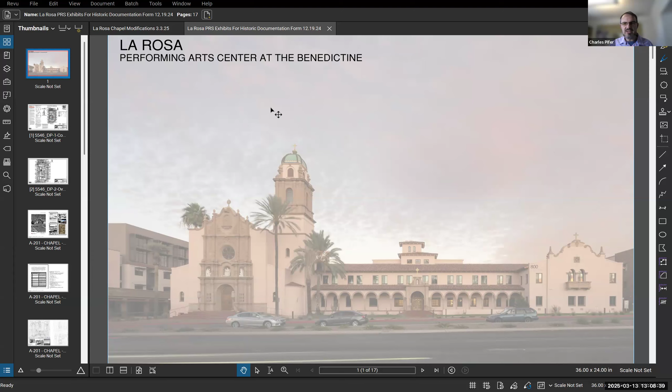There are going to be two projects here, and for now they're on the same campus. For now, all we're talking about is a minor modification to the plans we previously reviewed, as Michael stated, for the chapel piece. So what we're looking at here is the previous set. I have a one-pager here I can scan around on that describes everything pretty quick and easily, or I can give a bit of the past history on the project.

I'd be curious if anyone would want a greater level of detail, or if I should just dive in right here. I'm okay with diving in. What about the rest of you? I agree, I think it's still pretty fresh for all of us, so a minor review is fine for this one. Okay Charles, great, we can ask you questions if we need more detail.

Got it. And I can pop right over to the other one and we can look at what we looked at before. So I'll go ahead and dive straight in.

After we completed our egress study for the building, and this building has considerable need for that as the chapel space itself will be hosting up to 650 people, there's a significant egress requirement. It turned out we weren't able to meet the width at the exit that we have here.

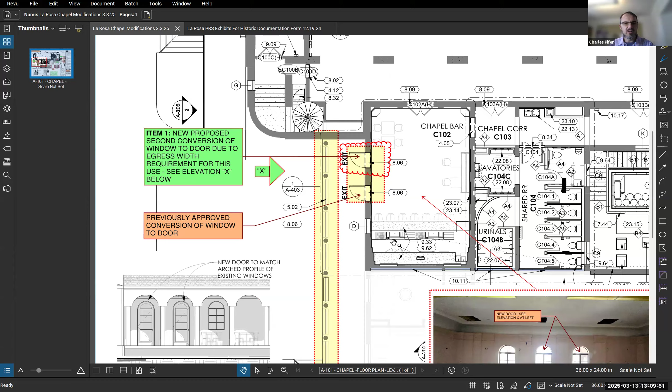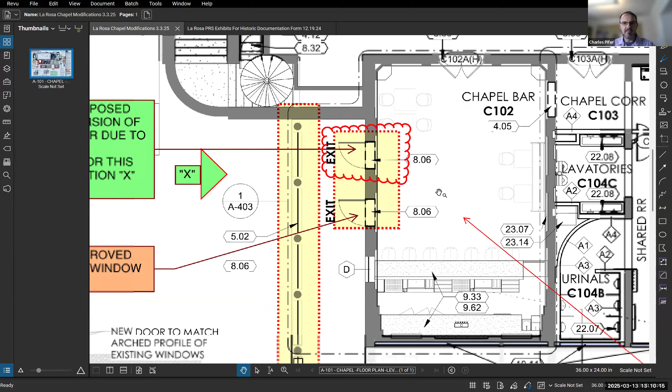The previous version of the plans that we reviewed had only one of these windows converted to a door here at this facade. We are now proposing to do the exact same treatment with the exact same spacing of mullions to match over to that existing window that is to remain. So now there are two of those. They are exactly the same as each other, side by side, the same treatment we looked at previously.

Here is a photo of the interior of the room. What we are proposing is that we will just be removing this masonry beneath the windows and converting them into a door of that same width. Maybe I'll pause there and ask if there's any question. I think there are two other items related to this project I'd like to discuss and see if anyone has any commentary, or I can take questions at the end.

I'm good. Everybody else okay for him to move forward? Yep, I'm good. Great, okay. And Joel gave you the thumbs up. Go ahead.

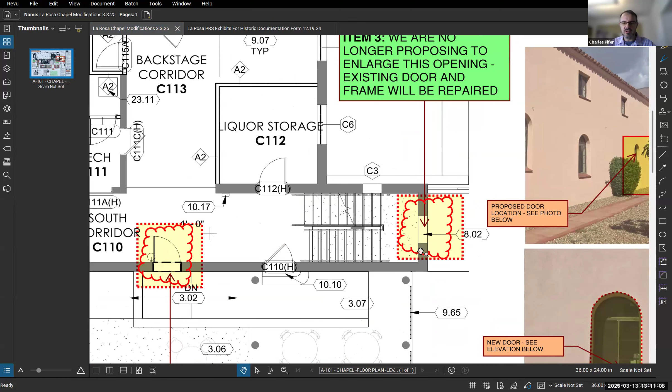Similarly, what we were proposing previously was that we were going to be enlarging this door here so it could be used to load large equipment in through this sort of back-of-house stair. The owner has determined that they do not have a requirement to move that large material through this door.

So we are now proposing to do nothing to this door other than to repair it in kind. It is a half-light door. I thought I had a picture of that - perhaps not, I think it's actually in the other one. I can zoom over to that, but it's a half-light door that we'll be just repairing. It's an existing door that will remain here in lieu of new saw-cutting a large opening and putting a double door at that location.

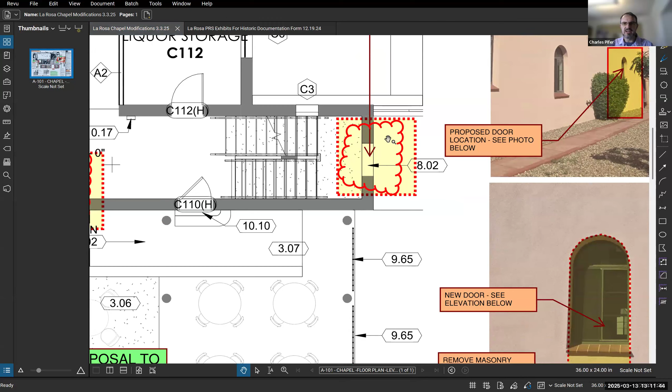Okay, and then in this same area, the ownership has determined that the current configuration of this door here—for a little reference, there's a bar getting installed in this existing courtyard, and the people who operate the bar occasionally need to go to this room right here.

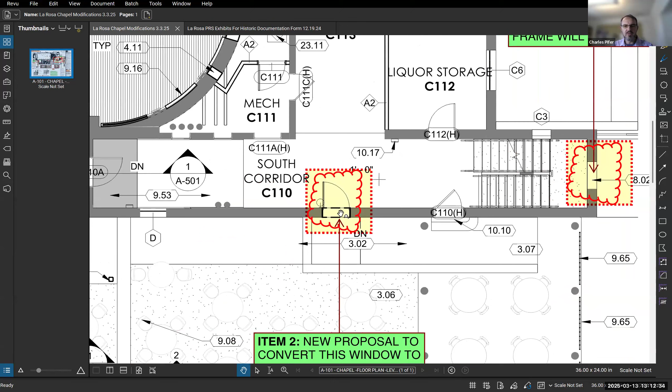And so there's a need in non-emergency conditions to go in and out of this door. This is the up portion of the stair, and they were worried that somebody's going to open this door just as someone is walking up, and they'd lose some teeth or sustain injury due to the proximity of the door to the landing. So it would be their preference to do the same thing we're looking at on the west side of the building, at this location inside the courtyard.

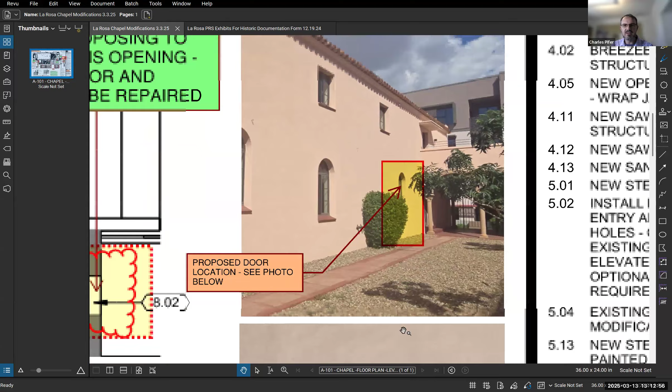For reference, here's a picture of that condition in this interior courtyard. This is not visible from outside the parcel via any vista, so this is the location we're proposing to do that same strategy. This would be the door, and it'll be exactly the same as the doors on the west side—a custom steel door with profiling and detailing similar to the existing window in place.

I'll note, as identified before, there's a grade difference here, so in the previous version we were proposing a ramp up to this door. The ramp is now configured slightly differently so that door is effectively abandoned in place, but we're maintaining the historic concrete component of the landing, casting around that and preserving it, as well as around this column. We'll provide 2 new steps up here, and a ramp coming down this way so they can provide an accessible route into this rear space.

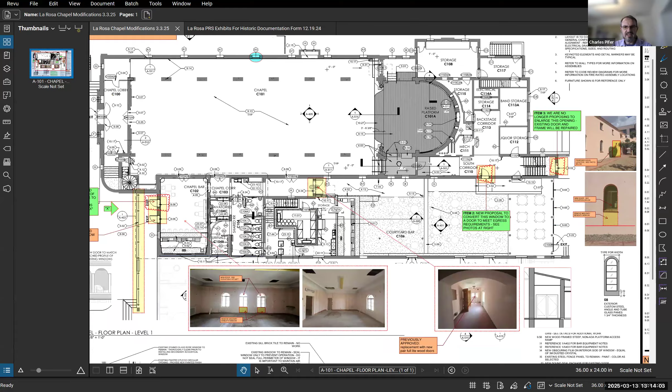And that's it, actually, for our proposal here today.

All right, who wants to start with questions? I can start, since I reviewed these when they were maybe going to be a minor review.

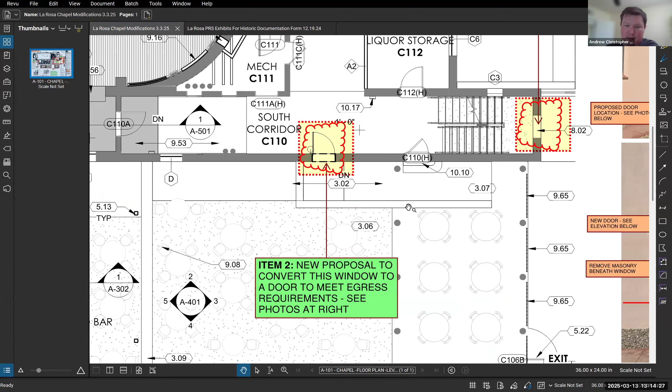The new ramp here—it looks like that's going to conflict with one of those columns in the colonnade. What are you planning to do there? Are you just going to pour concrete around the base, or try to adjust the base up? My thought for both of these elements is actually to attempt to preserve them in place.

To essentially consider the ramp to be reversible, which would mean we're going to provide a compressible material around the base detailing of the column when we cast that concrete, and a release membrane at that location so it could be removed at a future time. I think moving the base detailing up, we can catch a bit of that here—the ramp will be high enough that we'll be into the primary segment of that, and this will all be concealed and, in theory, restorable at a future date.

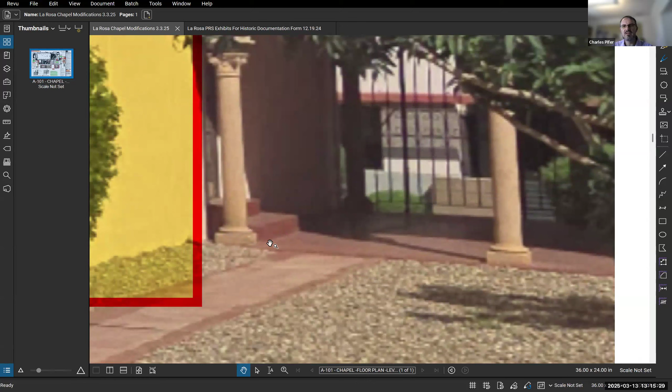Okay, so you're going to do an expansion joint and some sort of membrane there. Yep. Gotcha, okay. That was it. Oh great, okay Joel? No, he answered my question.

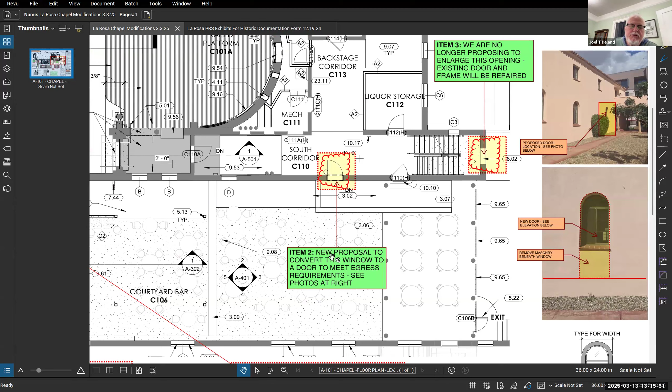Before, about how we're going to get in that door—a ramp, obviously, and 2 steps. Okay, and do we feel comfortable that all of the conditions we put on when we discussed it previously were met? Yeah, you're going to do the same door that you're doing in the other spots, right, Charles? Yes, correct, it'll be exactly the same door.

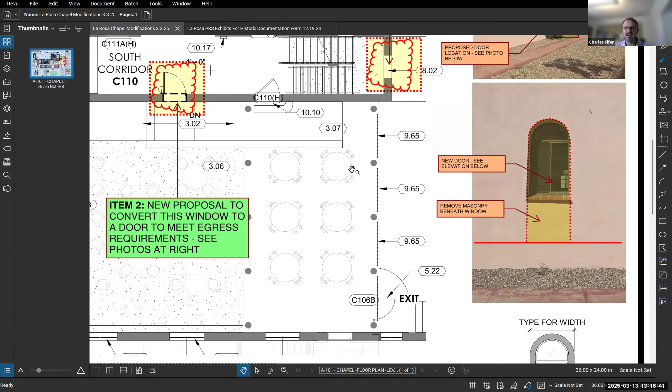I will add that we have added, as you can see here, this is sort of a version of our new plan, where we've added this gate material here, and it shows up elsewhere too. I could pull the main plans up if useful, but we now show that these are to remain. I can also note we've reduced the amount of landscaping going forward in the plan set, so there will not be any irrigation shown in this area at this time. The plans as shown depict the amount of plantings that will be in the area, per owner direction.

So can you point out—is there any planting, or is it all just DG? No, it'll be a mixture of DG and paver.

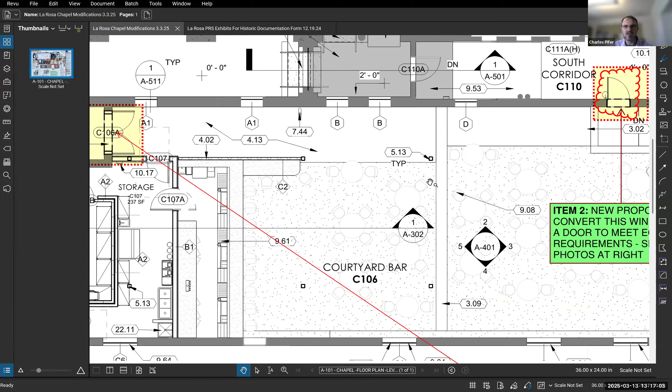So the area here that is just sort of white is paver, and then a concrete strip here, and then stabilized DG on the other side of that, which is effectively exactly what we had before. I think that we just sort of had an inkling of a landscape plan that wasn't developed, and that has sort of ended up just not moving forward effectively.

Okay, I think I remember, correct me if I'm wrong, Joel or Terry, when we initially reviewed this, there was some landscape in here a long time ago, and it died at some point, during or before construction. And I think we had talked about these courtyard spaces being important to the character of the building and them having at least some vegetation or trees. So I'm a little concerned by that, but I don't know how the rest of you guys feel.

It seems very stark. I can give a little bit of background information on that, just as to where we're currently at with that, if appropriate, I can also let others answer now if that'd be useful.

Let's see if Joel, did you have the same concern? Well, I do, and now that Andrew's brought it up, I do remember. And what my vague memory is, is that we saw a dead citrus tree. Was that right, Andrew, or what? I think there was some citrus in there.

Yeah, yeah, and I agree with Andrew on this. Yeah, so, I did too.

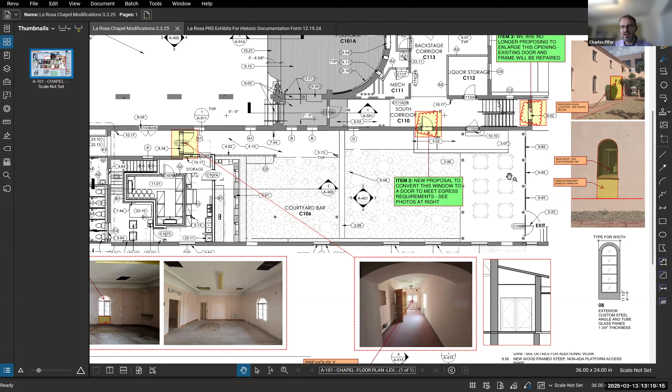And so the ownership does want to have plantings in this area. And so I think I would agree that the original condition can still be met, and that our intent is to, in the future, as part of this project, come in and do a revision to that development package so that we can add that stuff back in. And so I guess I would hope that maybe we could maintain that condition so that we can then have the opportunity to come back and do that at that point.

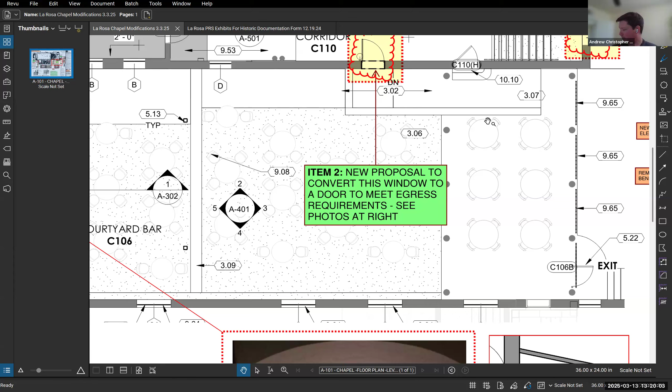Does that sound reasonable? Yeah. Or yeah, I think so. Yeah, and that's what I was going to suggest. So, if we're ready, Andrew, you could make a motion and include that and whatever else you'd like to include. Yeah.

I'm just typing it up, so I'll have it ready in just a moment here. Okay.

Madam Chair, for the earlier item, who supported Joel as a motion maker? Who was the second? There isn't one. He hasn't made it yet. No, I mean for the legal action report. The legal action report, I'm sorry. It was Savannah. Okay, thank you. So Joel and Savannah. Thank you, Madam Chair. Yep.

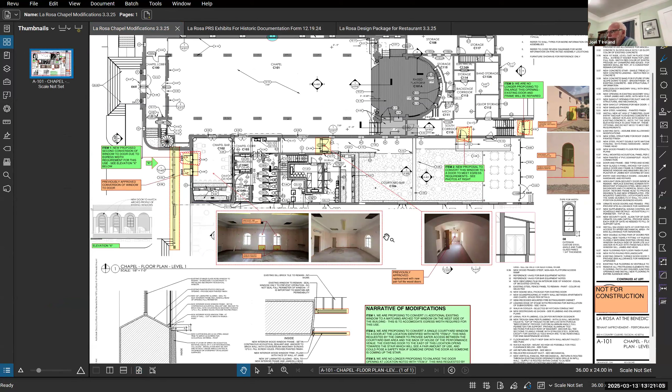Okay, all right. On the matter of item 3A, SD 1024-00100, 800 North Country Club, I recommend approval of the project as presented with the following conditions: 1, that the courtyard landscape should come back as a minor review; and 2, a barrier should be placed around the column base to allow for reversal of the impacts caused by the new concrete ramp in the future.

Okay, before we second it, is it 1024? That's what I have on my agenda. I thought you said 0124 or something like that. Should be 1024. Okay, great. So we have the correct one. Okay, is there a second? I'll second it. Yeah, this is Joel.

Okay, is there further discussion? Okay, if not, Terry says aye. Andrew, aye. Joel, yes. And Savannah recuses. So it passes 3-0. So thank you, Charles, thank you guys very much.

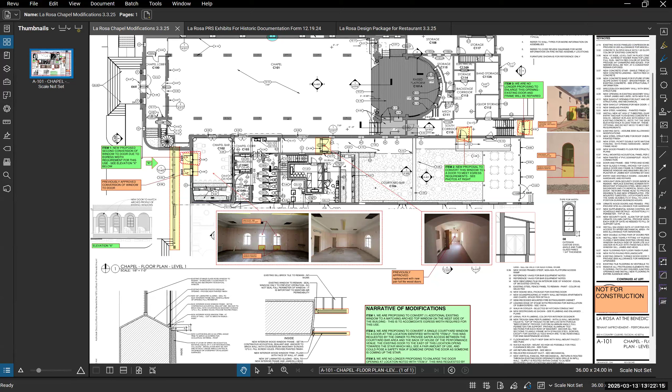Yeah, and let's move on then to case 3B, which is SD 0325-00033 at 800 North Country Club. And this is also for the Benedictine Monastery, La Rosa New Restaurant. Full review, Sam Hughes National Historic District, contributing resource rehabilitation standards. And Michael, do you have background? The background is basically the same, Madam Chair, because when Charles first came to you for a courtesy review, he was doing the courtesy review presentation for both the chapel use and also the restaurant.

But subsequently, when he came on October 10th, he focused just on the chapel. So today he's focusing on the restaurant, which had not been discussed in detail before. That's all I can say.

Unless I'm presenting it differently, Charles, you can correct me. That is accurate, yep. Go ahead, Charles. Sure, I think you still have control. Great, so thank you guys again, of course.

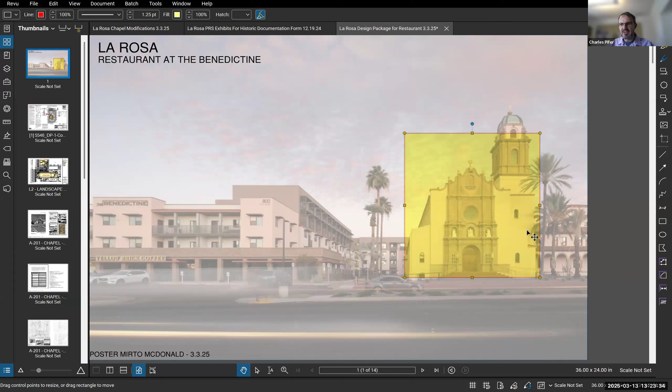So what we were just talking about is this building over here, the chapel building. Now we're going to shift our attention over to the tenant space within the new building that was constructed in 2020, 2021, also by PMM. It has been a vacant shell space for the duration of that time, and we are now looking at developing it into a restaurant.

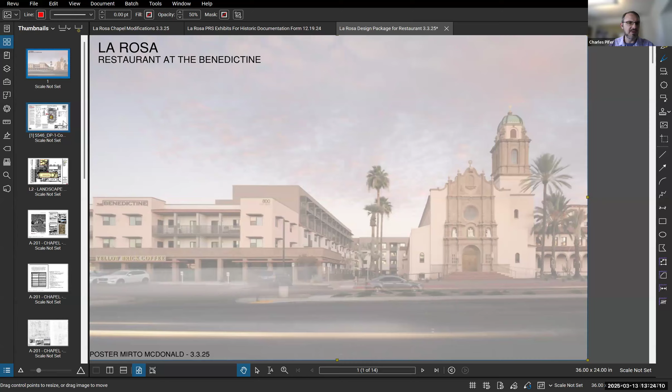The restaurant is associated with the same ownership as the La Rosa Performing Arts Center. I don't know if that really is of consequence to anyone other than maybe personal interest.

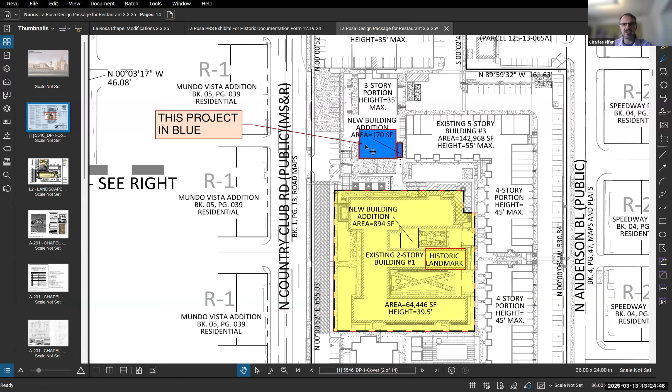As I stated, this building was constructed in the early 2020s of this century, and we are looking at it as a result of its proximity to the historic landmark. The landmark boundary is such that the project actually sits outside of the landmark boundary. You can see the landmark boundary here in yellow, and the project that we are proposing as part of this presentation here in blue.

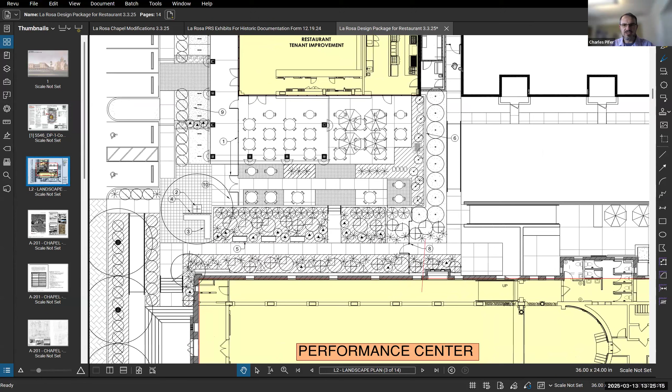Just as a bit of additional detail here, here is the performance center and the restaurant, and this is the site that exists between them, which will be left primarily intact with a few exceptions I will describe here, which I suspect may be the most interesting part of the work that we have.

So going through my presentation here, this is the documentation for the PAD and the historic landmark documentation for the monastery site. I don't think there is much reason to delve into the content of the landmark, other than that the monastery exterior and landmark boundary are described in the development standards table that's part of that landmark.

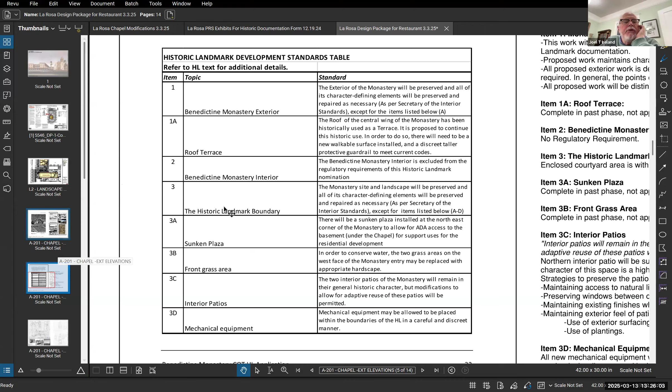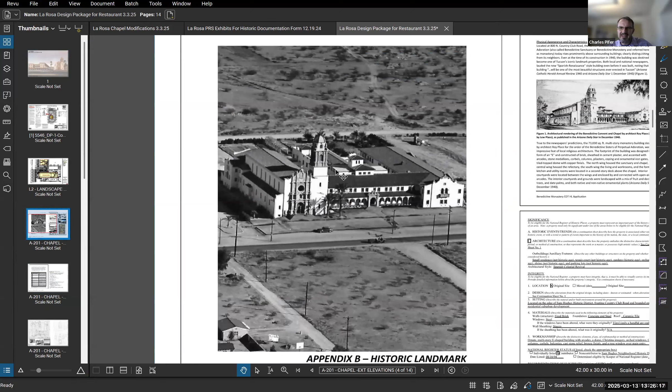When was that picture of the monastery taken that you began with? Do you know? This one here? The black and white one, yeah. I would guess probably 1940, roughly. Oh wow, okay. The anecdote is maybe a little bit later, but I think that's about right, when it opened. So I would say 1940 is about right. The baldacchino within the chapel currently was delayed by World War II, so it couldn't be installed, which makes it easy to remember the dates on this particular one.

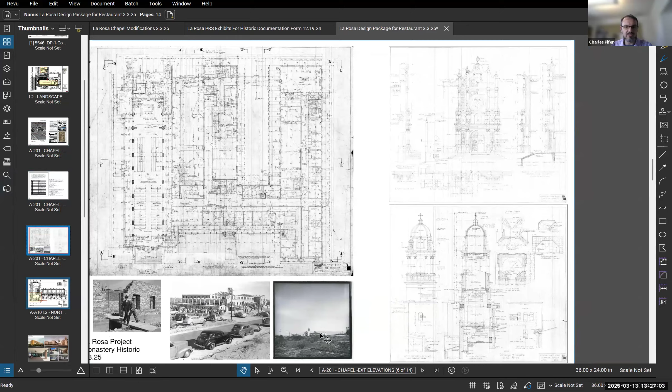So I just included this, which is what the building was that is the landmark here, not the building we were talking about, just for background reference. And here again is another historic photo, for reference, circa that time, where we can see that there wasn't much around. And here's the actual construction.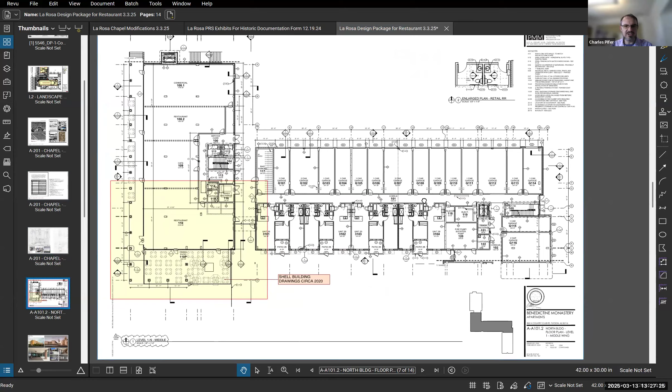But here's the equivalent version of that, which is our 2020 drawings of the shell space. You can see here the area in question is everything that is south of this line I've just drawn here: restaurant unit 110 and associated dining patio, as well as a little bit of this area right here. So moving forward, I'll take a look at some of the buildings.

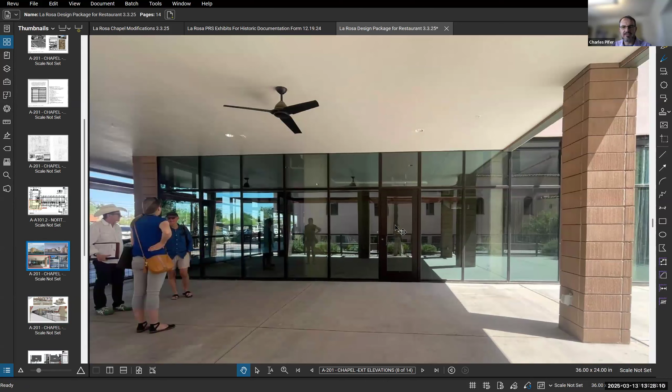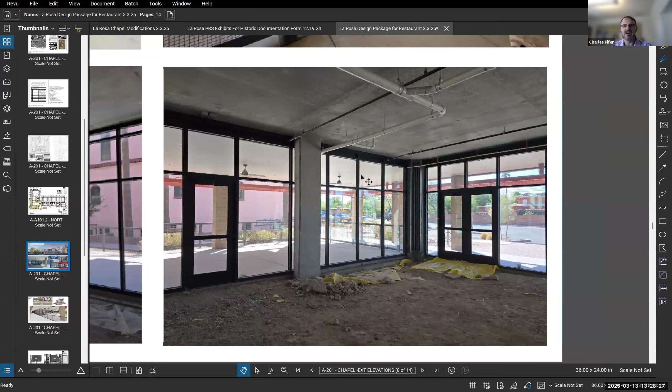So we took a look at this, but this is the patio that we're going to see. It is covered by this masonry colonnade here. Here is an image of that looking west, an image of the primary area of modification of the exterior of the building looking north, and then some interior shots: this one looking towards the monastery chapel itself through the glass, and another looking a little further west through the same glass. Then this is the area we looked at, a breezeway between this portion of the building and the residential component, which would be right here, looking that way.

Adjust my earbud there. Okay, so starting with a few 3D views of the work that we propose.

You can see here that we are predominantly leaving the major infrastructure of the building intact. This is primarily a TI of an unused space that we are now converting into this restaurant. We're making use of the same patio, making minor modifications to the limits of the paving in this area, and adding this small stair that you see at the very front of this image.

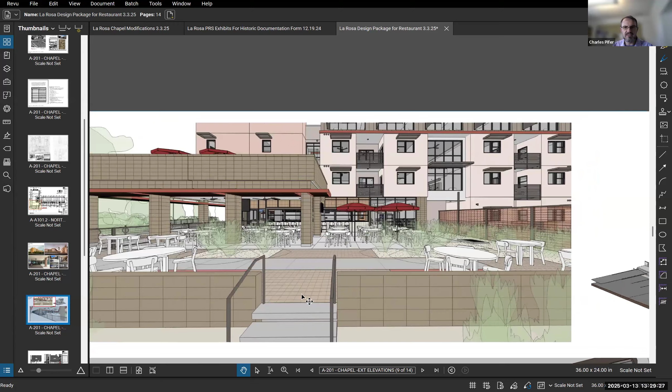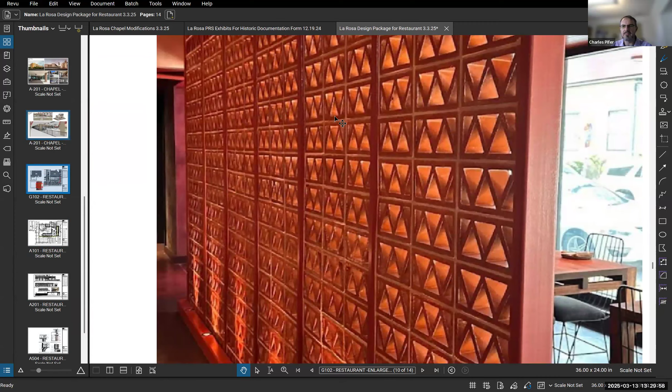One other item to talk about at the exterior is this element here, which is what we call breeze brick wall material. It is semi-transparent, and I have an image of the particulars of that material. It is a terracotta brick type material, breeze block, but since it's of a brick format, we colloquially refer to it as a breeze brick. You can see the limits of that there.

So while we are outside, I'll go back here. You can see we are modifying the existing glazing of the building to include a new double door at this location. This double door is existing to remain. We're primarily working on this glass facade here.

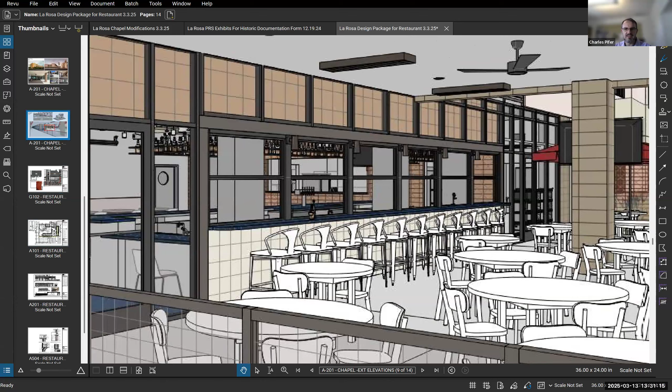We're adding a bar. We're predominantly removing this glass and reinstalling a different storefront that has a bar with upward pivoting windows that can open up so that it gives an indoor-outdoor connection between the bar and the patio. Otherwise, the patio is essentially in the condition that was intended to be used when the building was originally designed, which was as a restaurant patio.

The limits of it are just expanded slightly, and we've added this screening element here. Here is a three-dimensional view of that, which shows you the limits of the patio as well as the breeze brick element. That element is taller than the adjacent site walls, which are currently sort of minimal height as required to separate different grades, which is the existing design.

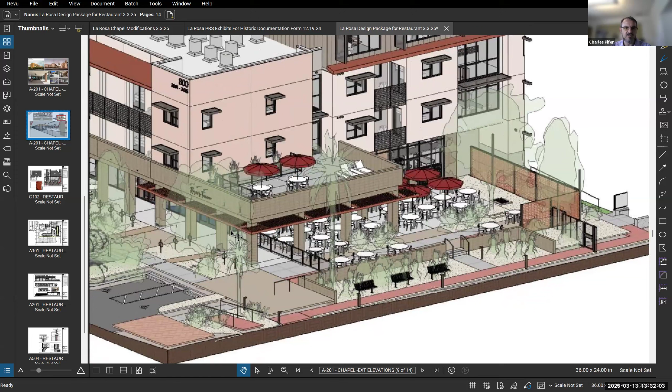So the only new element that we're looking at here is this piece here, and then a little bit of an extension of this fence. The remainder of this fence is extant currently. So that's the primary modification to the exterior of the building. I would maybe pause there.

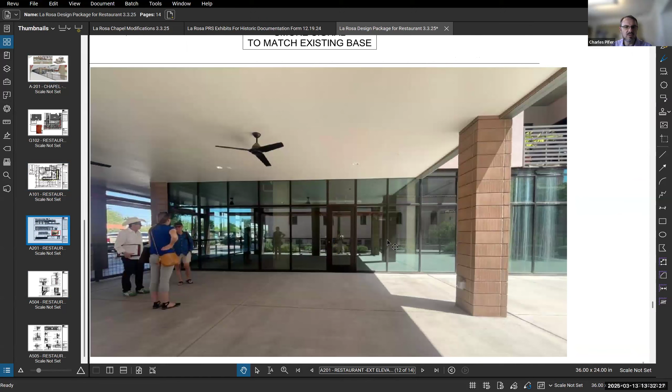I can talk a little bit about the interior, and I can show elevational information here about exactly what we're talking about, and then cross compare that to the current condition. But I would maybe pause here to ask if there are any immediate questions or thoughts about what I've presented to date. Andrew or Joel, do you have questions on this part?

If you'd like to ask them now. No, looks good to me so far. So far, so good. Okay, same with me. Go for it.

Great. So it's going to be, I think, an exciting restaurant. I don't think I can share too much of it. It's a pizza concept, which is great because we are not required to put in a Type 1 hood. We're able to do a minimal footprint of that, which is good.

So just to give a little bit of a tour here, you'll come in through either of these doors, depending on your want, I suppose. You're greeted with a bar as you come in, a service window here through which the food will be delivered out. And then what we call the conversation pit, developed here in the corner, which we think will be a signature element for the restaurant, surrounded by a bit more seating.

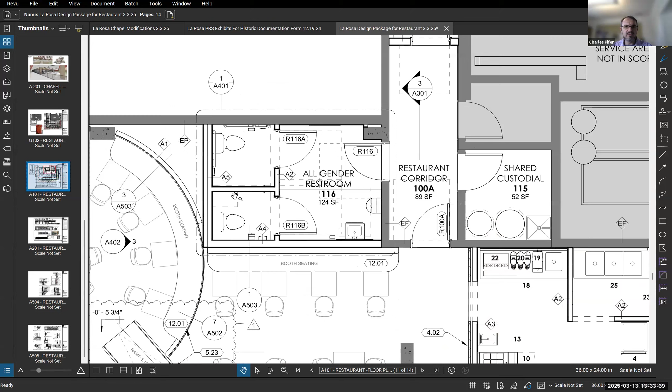We are developing a restroom here within the tenant space. That same breeze brick element is actually installed all the way along this facade here, the breeze brick that exists outside. There's a tiny little bit of that inside as well to tie it together. This is that same breeze brick material that separates the dining area from the kitchen.

The only other item that has an exterior impact on the building is that there was a requirement to add additional walk-in cooler space for the building. That is this area that is highlighted here in yellow.

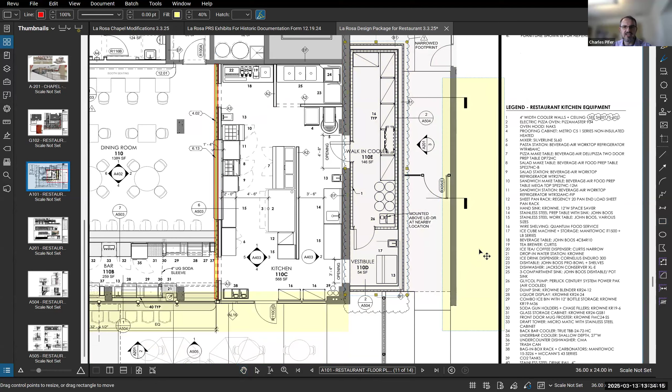So currently, this breezeway that we looked at in photos before is the full width of this darker yellow that I'm now going to delete. The pale yellow is what's coming in as a new built element in that space. I think you can see here in this view from this area that we are infilling that piece right there and just making that corridor breezeway a little bit narrower.

I guess I'll go back to the plan and open it back up for questions. Obviously, this building itself is not a historic building, so I would just be happy to address any questions or comments you may have.

I don't think we'd be looking at this for anything other than compatibility. So, Joel, did you say any questions? Well, not really. Although there's some different aesthetic choices I might make, I don't see anything that's incompatible, if you know what I mean. So I really don't have any comment, and would support this.

Okay, thank you, Andrew. It all looks good to me. I do appreciate the terracotta breeze brick, tying that material into the predominant roof material of the monastery. I think that's great, so it looks good. Thank you.

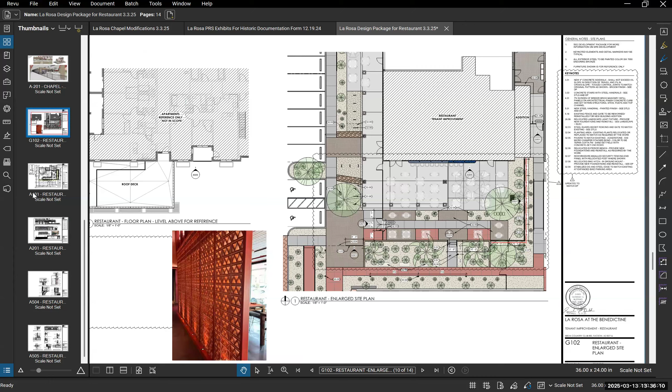Okay, and who is ready to make a motion on this case? I can do it. Thank you, Andrew. On item 3B, on the matter of SD 0325000033, 800 North Country Club, I recommend approval of the project as presented. This is Joel, I'll second. Excellent, okay, any discussion?

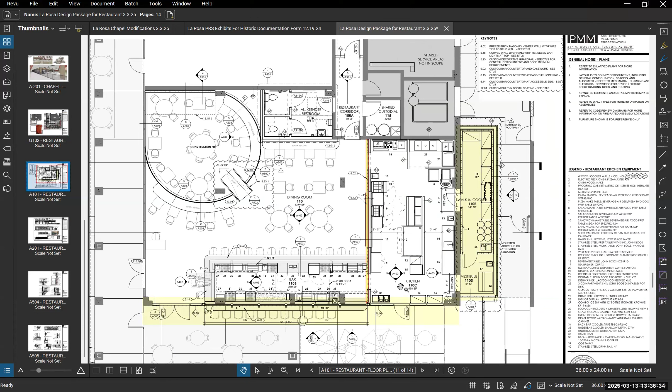Nope. Okay, if not, I'll call roll. Terry says aye. Andrew? Aye. Joel? Aye. Perfect, it passes 3-0.

And I'm going to find Savannah, unless she's in the office with you, Charles. She is not. Okay, so I'll find her. Just give me one second. We'll just take a little breather.

So you're good to go, Charles, unless you have questions about the next steps. No, well, actually, I would assume that we're going to get... actually, I'll just let Michael tell it.

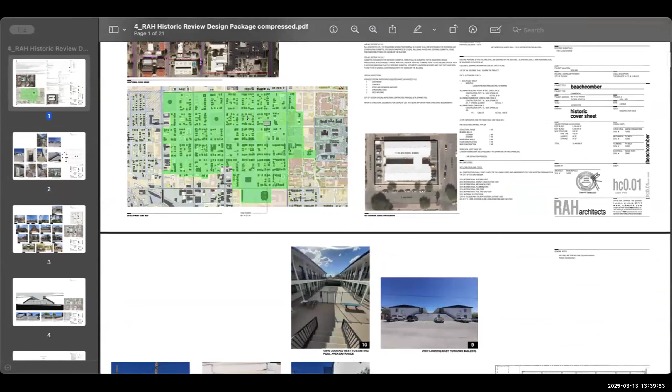Let's wait for the chair. I'm so sorry, it's not really my dog, it's my daughter's dog. We'll blame her. It's just Joel's dogs that are usually barking when we talk. Yeah, mine are usually the ones.

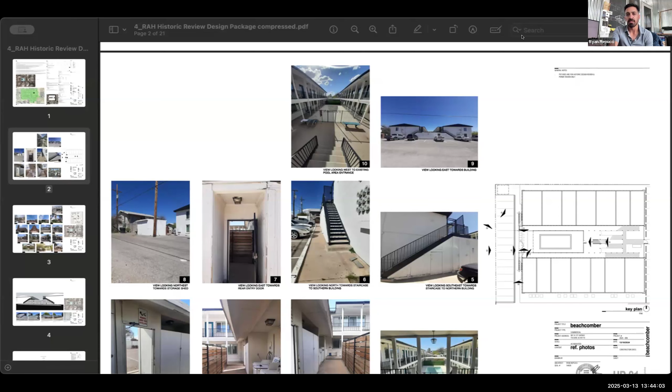I can. Great. So in short, just as a summation of what was already said, this is the Beachcomber Apartments, and it is a non-contributing structure. The proposal put forth before the board is essentially to remodel the exterior face of the building. And forgive me, let me zoom in a little bit. Remodel the exterior face of the building that's around my cursor right now. It's currently clad in white T111 essentially. And what we're essentially doing is reformatting the face, keeping the stairs in their exact configuration, keeping the form of the building in its exact configuration, including building height. Essentially, I'll just go to the rendering if I can zoom out.

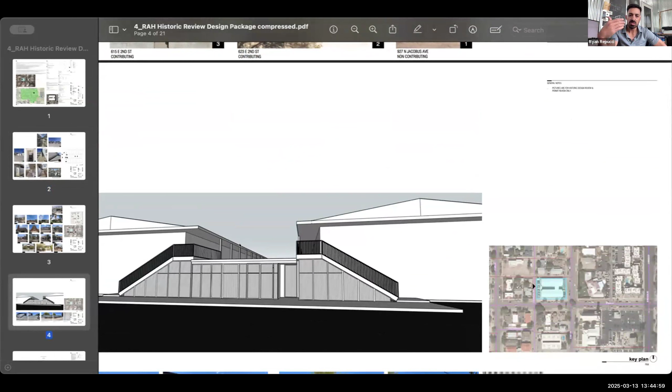There we go. Recladding that entire face with a corrugated metal skin that essentially slightly upgrades the face, but also pays homage to the fence that's across the alleyway. That's our neighbor to the west. Thank you, forgive me, to the west.

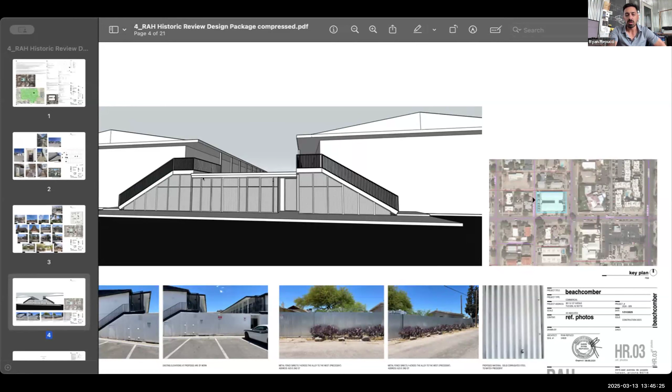As part of this project, the entryway is getting reconfigured from its current location. You can see it right here. It's still remaining as recessed. And then the interior, which is shown in plan, currently that face is basically concealing a series of washer and dryers and pool equipment, and then the pool beyond. Our proposal is to create an envelope for the laundry room, a small laundry room that's accessible and conditioned, and actually has a suitable area for residents to do their laundry. And then create a small pool cabana that's again hidden from the outside by this massing wall, for the pool and for the residents. There are a couple of doors that are going to occur on that front face.

I'll go back to that rendering. Those doors are going to be clad in the exact same corrugated material, and they're going to conceal service areas as well as pool equipment. So this face right here, we've created a kind of striation of vertical members that kind of breaks up that entire face and essentially conceals the fact that we have a series of doors. So it doesn't appear to be a series of doors, but appears to be an aesthetic feature of the facade.

As I mentioned, here's the existing elevation. The new elevation is going to be matching existing elevation. There's no changes in height, there's no expansion of square footage. It's simply a refacing of that front facade in that new material. And then the program beyond is obviously updating according to the owners and the residents' needs. I don't want to belabor a relatively simple project, but I think that's the vast majority of it. And like I said, any comments or questions are welcome.

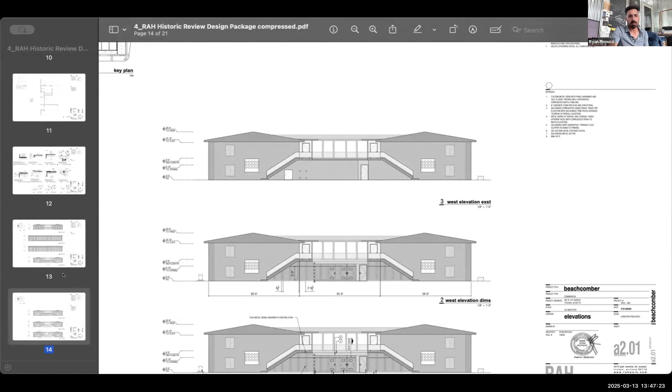So I've got a couple questions. One is truly an informational question. On the front of the building, there's a mural that faces First Avenue, and I'm wondering if the mural is signage, or whether this committee has jurisdiction to comment on it. That would be a Michael or Terry question, or if it's already gone through a review process, which might be Mr. Repucci's question.

For me, I can't speak to the mural. I don't know when that was placed on the building or if it went through any review process. I'd have to go back through historical photos, potentially on Google, to understand from a street view where that occurred. But I think I can narrow your search to within the past two years. I think the building was repainted and it was painted on top of that.

My question is whether, and I don't know, it's arguably just the name of the place. It's a scene of a beachcomber, huge, with a surfboard and the name of the company, and it looks like signage to me. But I'm a mural lover too, so it could be a mural. I don't recall, we never reviewed a case having to do with that, have we, Michael?

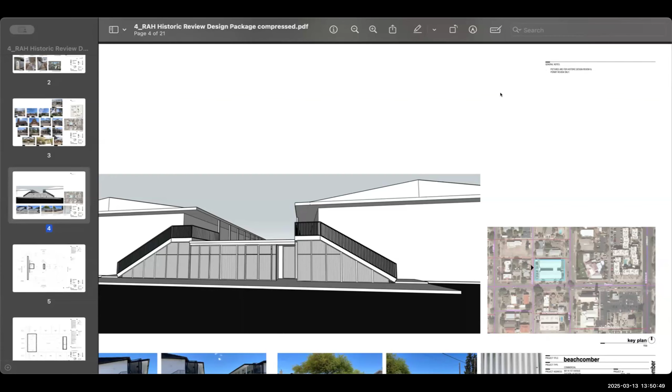Does this project cover any, how shall I say it, protections about the garbage that is back there, the garbage containers? No, we're strictly reserving the scope to just this face and the interior, understanding that there is a garbage container located back there. And I'll just say this plainly, the hesitancy for me to get into anything related to the trash...

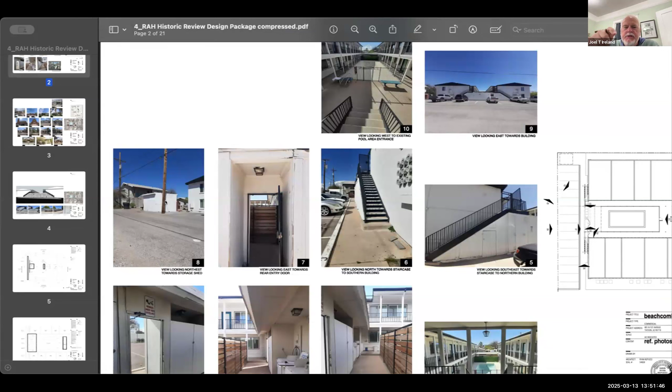...is the city of Tucson's requirement that the second we touch it, there's a lot more that goes into it. So we didn't necessarily look at that or the kind of outbuilding that's located there, I think it's in some of the photographs. So there's a lot of garbage associated with the trash from the city of Tucson. As a neighborhood resident, I just wondered if that was in the plans, because it really is a problem, but I don't know if it's subject to this review.

Madam Chair, members of the subcommittee, let's limit this to the scope of work that is before you today. The trash pickup and all that associated with those are zoning issues; if there are issues, zoning will have to deal with it and there will be requirements for those types of things. It is not one of the issues that is before the subcommittee today. Fair enough, Michael, that was my question.

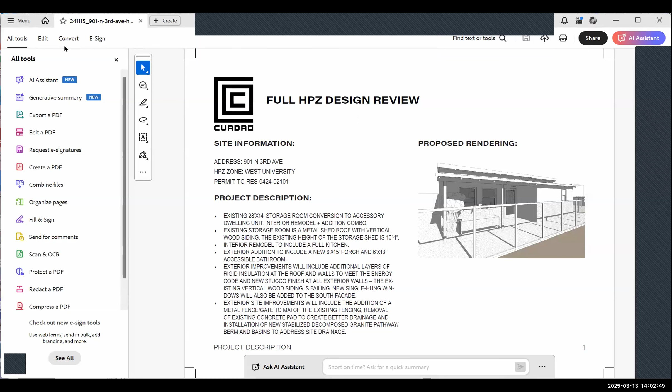All right, so this project was an existing shed structure that the homeowner had started to work on, and had some drywall and some improvements, windows and doors. But they want to convert it to an ADU, so it's a fully permitted secondary dwelling, and we needed to add a bathroom and a kitchen. Then there's a few other changes to the existing structure.

Yeah, the existing storage unit had kind of that cheap T1-11 wood siding on it.

So we're gonna completely improve the exterior envelope to meet the building energy code, add stucco to the exterior, and then add this porch and bathroom. Those are the additions, so it's an addition and remodel combo. We're remodeling the existing structure to bring it up to code as a dwelling unit, and then adding onto it as well, which will all be brand new construction.

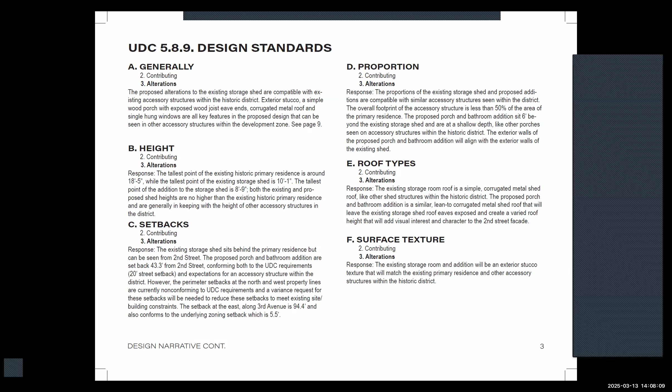The roof type - we're keeping the same language, a shed roof, and then just adding a shed addition in the opposite direction for the addition.

Surface texture: exterior stucco will match - it'll match the texture of the existing.

Yeah, the site, we're keeping everything the same. This came up in our last review, except there's an existing carport that we'll be getting rid of. But other than that, the parking and everything will stay the same.

Yeah, the details - we're trying to, again, just be compatible with the existing primary residence. Okay.

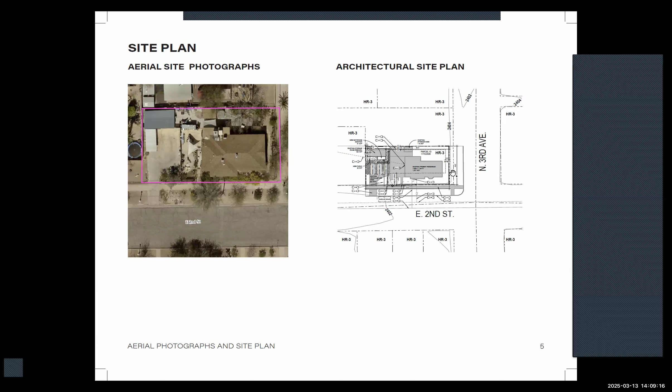So here's the site plan. I don't know if I can blow this up more. The existing shed, like I said, is here in this west corner, and the primary residence is here in the southeast corner. There's a parking area here, and the existing shed is in the rear of the property. The address is on North 3rd, which is running north-south, so I considered this street to be the primary street facade on the east side.

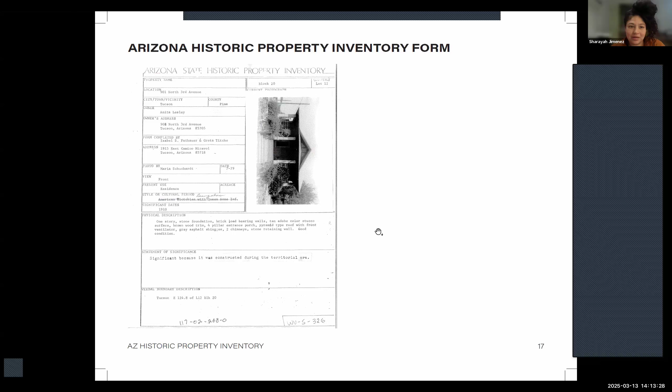And then these details we agreed we didn't really need because these are primary residences. Here's the historic property inventory form. So that's it for me. Was there any questions? Okay, well, thank you.

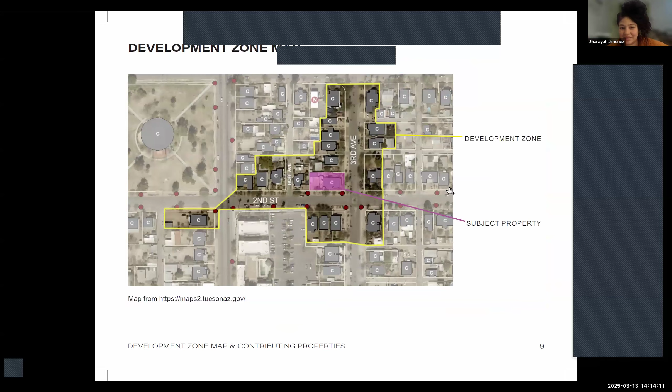It's okay. Okay, so we got a fence. We saw the fence detail. I'm assuming the gate will look just like the fence detail. Yes. And then is it just along that one edge, or does it jog around and connect up with another fence? It'll be just on this south run. There's an existing fence here already on the west side.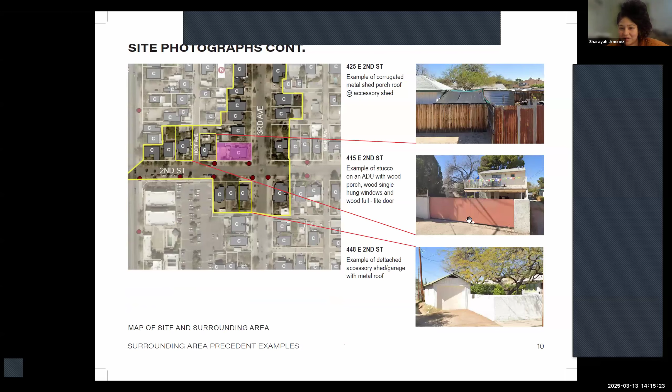I think you're taking the right approach for the ADU having a more open facade with the picket fence on the north and west side with reduced setbacks. Of course, I'll let my fellow commissioners comment too, but that seems fine to me.

There was a comment from West University that the east elevation keynotes update to reflect existing window, door, and materials. Can you explain that a little better, why they made that notion? They just wanted to see revised keynotes?

Yes, I think in some of the drawings we had originally proposed vinyl windows, and when I revised the drawings, I didn't pick that up in a few locations that were changing from vinyl. So it's just a typo that needs to be corrected in some places. I think in the narrative they mentioned it, and then maybe here in these keynotes.

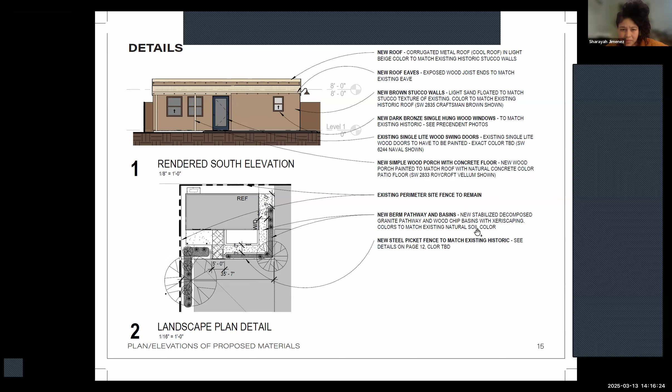Let me see here, yeah, I changed it. I changed it here. I think it was in the narrative where they thought that maybe I had it here somewhere. Oh, on the narrative - yeah, so they want to clarify narrative to reflect wood and removal of the clerestory.

And then the east elevation to reflect the existing window. So you're keeping that east window? Yes. So here, on this existing as-built elevation, this door and window are existing. So I just need to add some notes explaining that we're keeping those existing to remain.

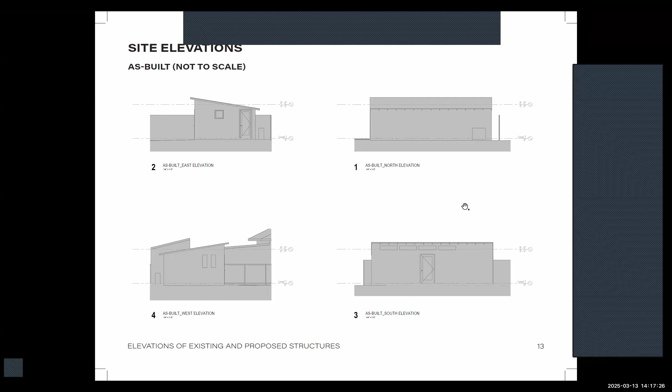The door too. Okay. And then here I could clarify too, like these clerestory windows are going to get demoed. These two little windows on the west will get demoed. And then this door is basically remaining in place. I think we're just keeping that existing in place as well.

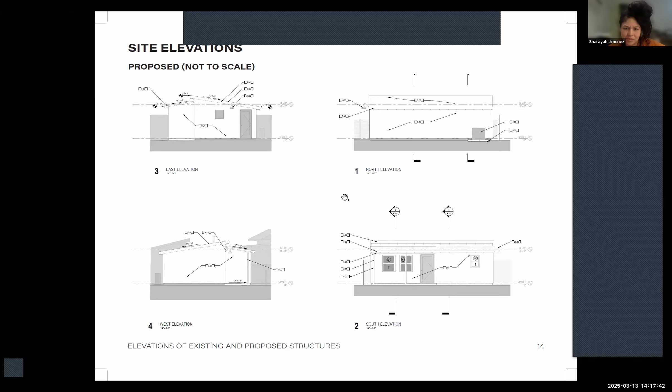And what is that existing door? Is it a wood door? They're all wood, yeah. Even the existing window is wood that you're keeping? Yes, I believe so. I think I have a photo of that somewhere.

Oh, I don't know, that one might. It's right there, you can see that little square. That might be vinyl, but that's an easy fix, we'll just clarify that we'll change that to wood.

That's on the east? Yeah, the primary facade is on the south, the street it faces.

So on the setback on the north and west, are you suggesting to leave the existing zero setback? I'm sorry, can you repeat that, Michael? What is your request for the setback? What are you asking? They just say it should be approved. What is the figure for that?

Yes, so let me go. I think I explained it here. So the setback from the street should be 20 feet, which we meet.

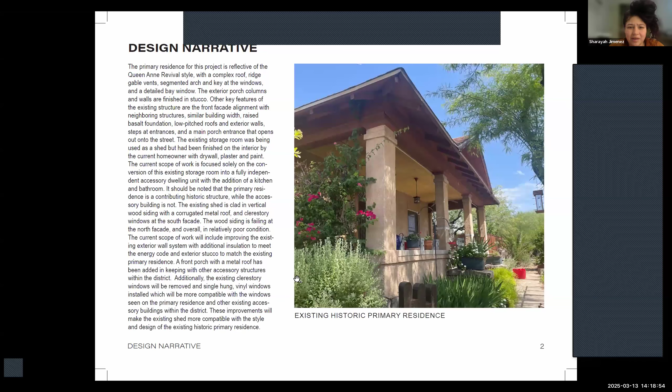Yeah, maybe the site plan, if I can blow that up, it shows it more clearly. Let's see.

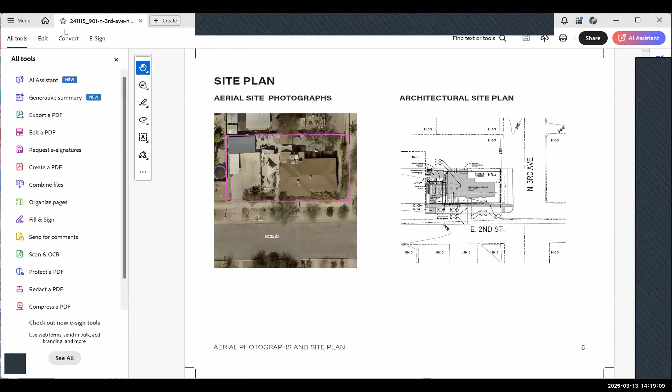Yeah, so the setback should have been 6 feet at the north side. We're requesting a reduction to 3'4" on the north side from 6 feet, which would have been what's allowable. And on the west side it would have been a 6-foot setback, and we're requesting a reduction to 2 feet 1.

Okay, thank you. Yes. Okay.

Are you good, Shannon? I think so. I think possibly the comment might be to replace that in addition to West University's cleanup notes - really it would be maybe replacing that one window to be wood.

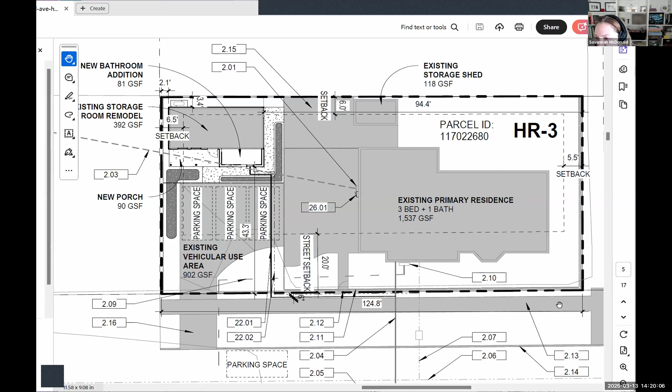But the last question I had was on the north elevation, there's mechanical equipment - is that just existing to remain as well? Yes, that's also existing. Like I said, the homeowners are kind of already using this as semi-interior space. They had already added that mini split, so that's also existing to remain. I can add those notes as well and make it more clear.

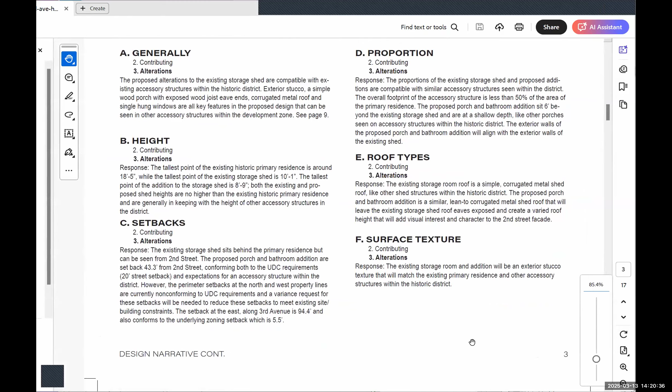Okay, that's it for me. Thanks. Great, thank you. Andrew or Joel? Sure, yeah, I can go.

I think that window noting to be replaced with wood is good. Everything else looks great. Are you doing any separate utilities for this project, or is the electric, for instance, being fed off the main house? So we went with the ADU option so she could get a separate address and tie into the existing utilities. We're trying to save some money there.

Gotcha, okay. And then the only other thing I caught - you mentioned that the stucco was going to match the existing house. I think you probably don't have to do that, it could be different. Normally with additions to historic structures, we actually like to see a distinction between them. I know it's maybe not the most attractive stucco texture, so if you want to go with something smoother or sand finish, I think you're fine to do that. Yeah, I think it's pretty chunky, it's a pretty chunky texture.

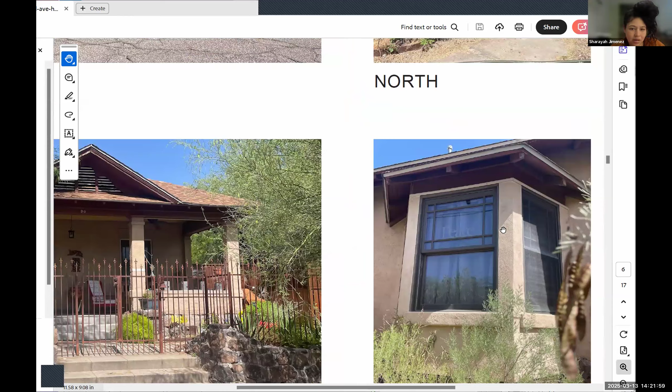Yeah, it's almost like they call it Spanish lace or something. So if you want to do something different, go for it. But the project looks great, so that's all my comments.

Okay, Joel? Joel, are you good? I agree, yeah, I'm sorry, I was on mute. So I agree with the setback question and answer that Sharayah presented, I think those are just fine. And I agree with Andrew about the stucco - it's all over West University, it's hard to repeat and really expensive, so I agree with Andrew on that one.

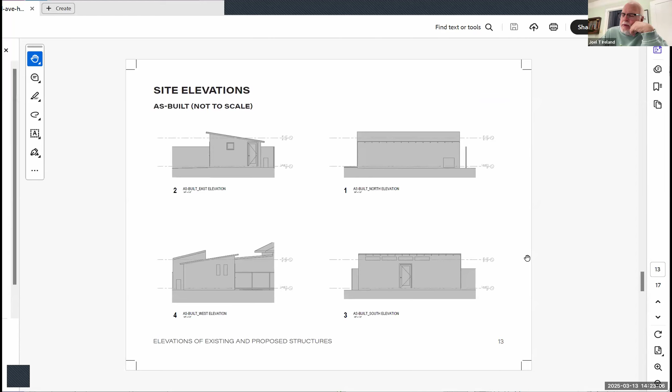Can you tell offhand, if you know it, what will be the square footage of this unit when it's done? Yes, let me go back to the site plan, I think I called it out there. When all is said and done, it was a 14 by 28 structure. 14 by 28, okay. But then we're adding on as well, so let me see, I think I have the square footage listed here.

Yes, sorry, this is so tiny. Yeah, I just couldn't see it, I guess. It's the existing, it's gonna be 392 plus 81. So what is that? Hold on, 392, I'll do the math plus 81.

Okay, good. And also just an interest question - I mean, again, my dog visits the dog at that house nearly every day. Yes, are you friends with Teresa? Yeah.

So why is the only reason for removal of the shade parking just that it wasn't coded, done by a permit or? Yes, it came up during our last review.

I don't want that to hold up the process. We would need a DDO and we're already past a year ongoing for this project in permitting. Oh, good, well good. Then we'll move, I'll vote to move forward. I was just curious.

You don't need a DDO. In the historic review process, HPC can waive the setback, so you really don't need to do a DDO. Are you in the process of a DDO? Have I been through the DDO? Why would they let you do that?

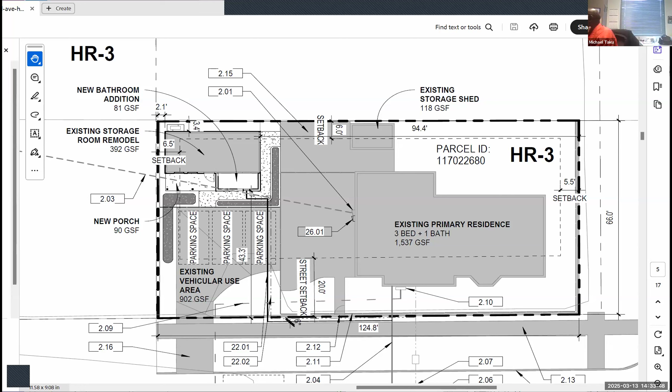Well, good luck with the project, and thank you.

All right, so we'll move on then to item 4, which is Task Force on Inclusivity Report Recommendations. 4A is discussion on best practices for naming of city and county owned physical assets. No report.

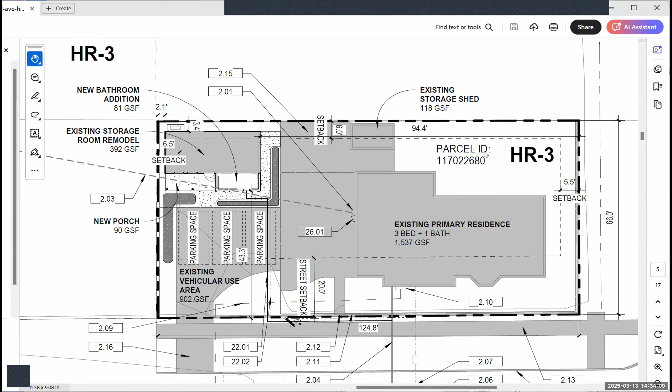And item 5 is current issues for information discussion. 5A is minor reviews, please.

Michael? Yes, Madam Chair, minor reviews. I have been busy here. Since we met last time, we have done a couple of minor reviews, and Andrew has been very helpful in this process within this time. We have minor reviews completed.

202 East University, that one was for a roof. 720 North 6th Avenue for a roof in West University. 941 North 6th Avenue for a roof in West University. We had 641 South Meyer for a roof in the barrio. 326 West 18 for solar panels in the barrio. And 510 West 17 for solar panels in the barrio.

Those are the ones that have been completed since our last meeting. I have some new ones coming up, and Commissioner Ireland has offered to help on these. Andrew actually helped us as the representative for PRS on this one. These new ones I am looking forward to doing sometime next week. Joel has offered to help, so he will be representing the Plans Review Subcommittee.